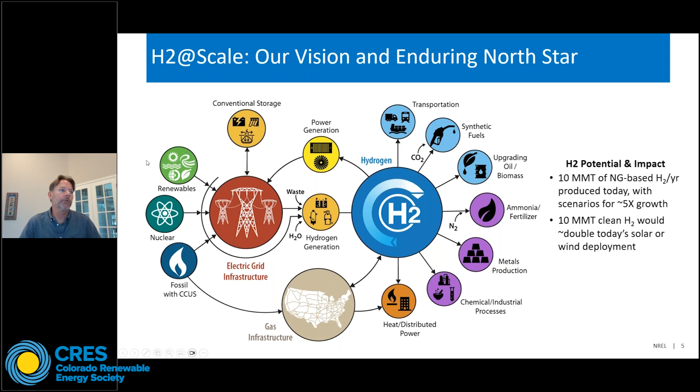So imagine if we're successful in some of these other applications, growing the need for hydrogen by up to 5 times, then we're talking about 5 to 10 times the renewable power on the grid. This is really going to draw a big need for renewables.

So that brings us to the hydrogen shot. This was announced June 7th of 2021, and then there was a summit held later that year. This was announced by the Secretary of Energy, Jennifer Granholm, and basically the target is to do $1 per kilogram in 1 decade - 1, 1, 1. The baseline is about $5 to $6 per kilogram from electrolysis in 2021, with an intermediate goal 5 years later of $2 per kilogram, and then the ultimate goal of $1 per kilogram in 2031, or 10 years later.

Just for reference, today's natural gas-based hydrogen is about $1.50 per kilogram for natural gas. So if you can meet this goal, you can actually undercut fossil or gray-based hydrogen.

Really significant impact. Here's just some of the assumptions, and you can see that the major cost of that hydrogen is the electricity costs. So even if we make the capital cost for the electrolyzers almost zero, we still have the energy costs. We're really depending on folks like you and others in the industry to keep driving down the cost of electricity - in this case, 3 cents per kilowatt hour in 2025, 2 cents per kilowatt hour in 2030.

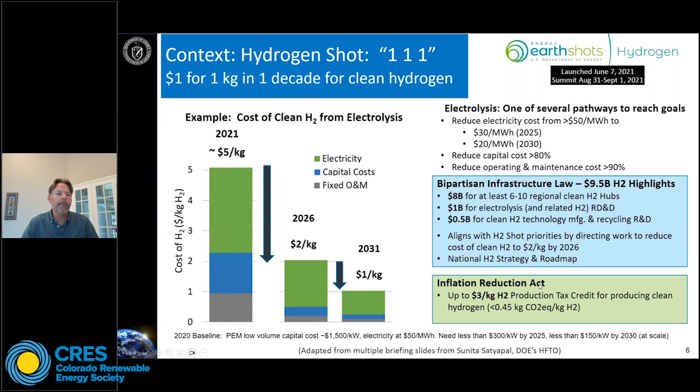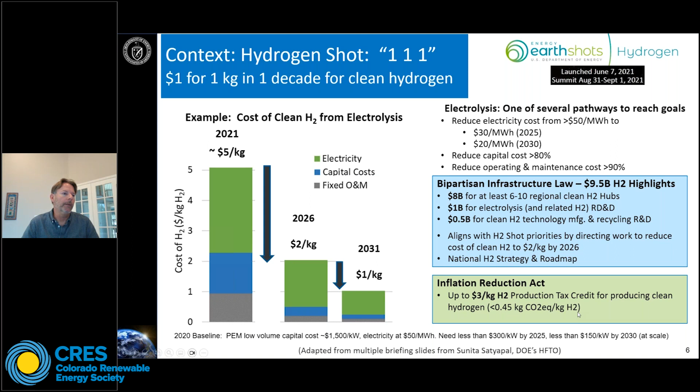And then the icing on the cake here is the Inflation Reduction Act, which came out last, this was last August I guess. This was up to $3 per kilogram of hydrogen production tax credit if you can make ultra low carbon intensity hydrogen, so less than 0.45 kilograms CO2 equivalent per kilogram of hydrogen. I've got another slide here that just shows that 0.45 kilogram greenhouse gas intensity or lower. You can get credit for higher polluting hydrogen, but the credit goes down significantly.

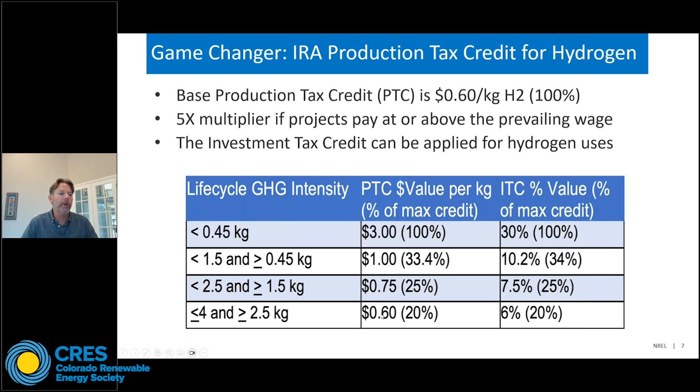So I just wanted to make sure everybody is aware that there's kind of a debate going on in the hydrogen community right now, primarily environmentalists on one side and companies on the other side. The reason why is while the tax credit was passed and signed into law last year, as with many tax credits, especially of this size, the Department of Treasury and IRS has to finalize the details of it because they're not contained or really relevant for lawmakers to decide these details.

So that's happening right now. I think it's actually supposed to come out in the next month or two, and you'll see articles from CPR and NPR touch on that a little bit.

But the things being debated are what NRDC is calling the 3 pillars. First is new supply, also known as additionality. This means if you want to make hydrogen from solar, you actually have to add new solar onto the grid to use that solar. You can't pillage solar that's already on the grid, because that would mean whoever was going to use that solar is now going to use fossil fuels until more solar is added. So that's the new supply or additionality concept.

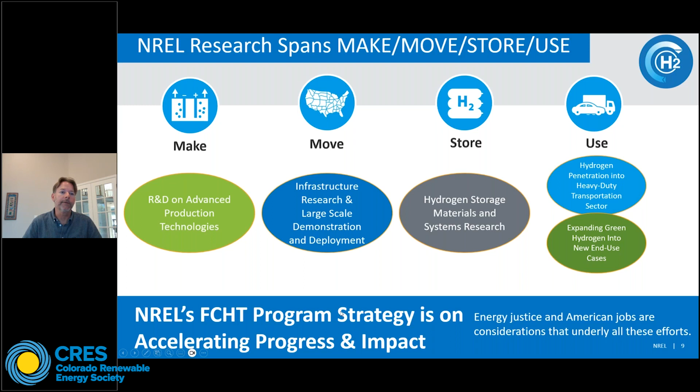I'm going to talk a lot about our Department of Energy programs and projects, but I first wanted to acknowledge that we're also very active with the private sector. This is a growing area, with our funding doubling from fiscal year 20 to 21 — about 35 new partnerships last year, and over $7 million in cash to NREL. For context, our DOE program is about $30 million a year, so this is getting up to about 20 to 25% of our research now being privately funded, taking advantage of and leveraging the investment made by the Department of Energy over the last decade plus.

Since I can't give you a tour of our lab right now, just a few photos. These are catchphrases from powders to power, spanning on the left side more fundamental science and understanding of materials and their electrochemical interactions, all the way over to the right side, where we're actually doing megawatt scale demonstration and research activities.

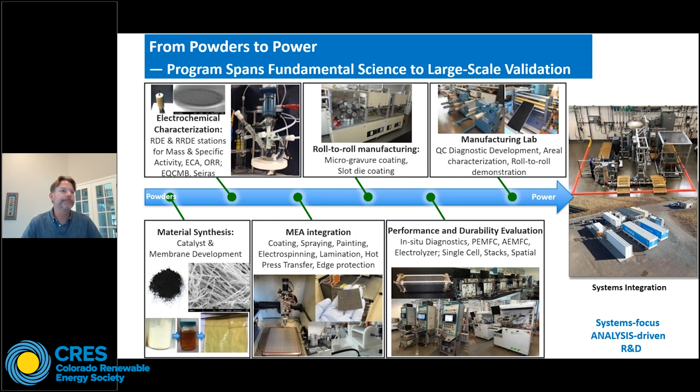I have one more detailed slide here on advanced production technology, since it is so core to our research at NREL and the hydrogen energy earthshot goal of $1 per kilogram in a decade. Wind and solar took about 40 years to get cost competitive, and now they're cheaper than the alternatives. We need to do that for green hydrogen, not in 40 years, but in the next 5 to 10. So in everything we do, we're trying to accelerate the rate of innovation and development, and work with our private sector partners to help them get to market with better products sooner.

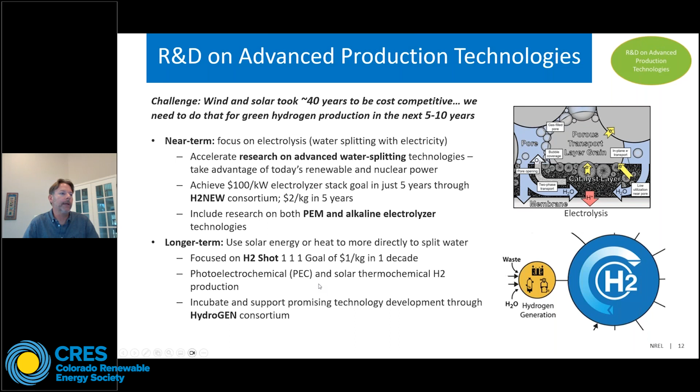On the near-term focus on electrolysis, we're shooting toward a $100 per kilowatt electrolyzer stack goal in just 5 years. There's a consortium that NREL leads called H2New, hydrogen next generation electrolysis of water, which includes both PEM and alkaline electrolysis. Longer term, we have a consortium called the HydroGEN Consortium, which looks at other technologies such as photoelectrochemical or PEC direct water splitting, solar thermochemical, and high temperature electrolysis.

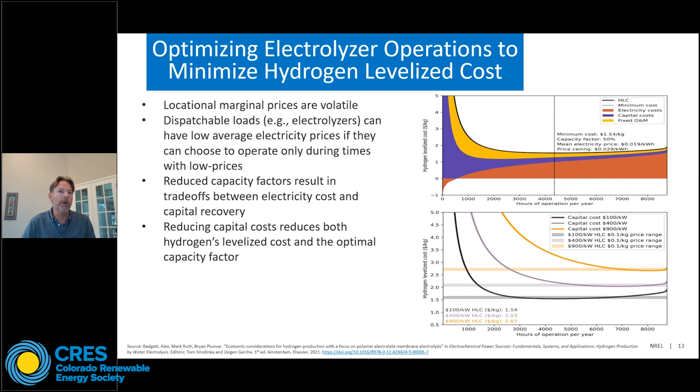We collaborate with a number of other national labs. I mentioned the Hydrogen Consortium and H2New. We also have HyMARC on hydrogen storage, Million Mile Fuel Cell Truck on the fuel cell area, a bio consortium, and a HyBlend consortium on blending hydrogen in with natural gas. So we collaborate wherever possible with other national labs. We are forced to compete sometimes, and when we are, we do compete, and we do pretty well.

Moving on to our spectrum of electrolysis research, really driving down the costs. That for us is happening mostly at the single cell, where we're trying to optimize the materials, thrift iridium, which is more expensive than platinum, and get those out of the cells as much as possible, although there are very few good alternatives so far. We scale those up into short stacks, and then we have this thing we call translational R&D, where as we scale up, we try to feed the lessons learned from system operation and durability back into the smaller scale research. And then finally, we do megawatt scale stack and megawatt scale system research, and I'll talk quite a bit about that now.

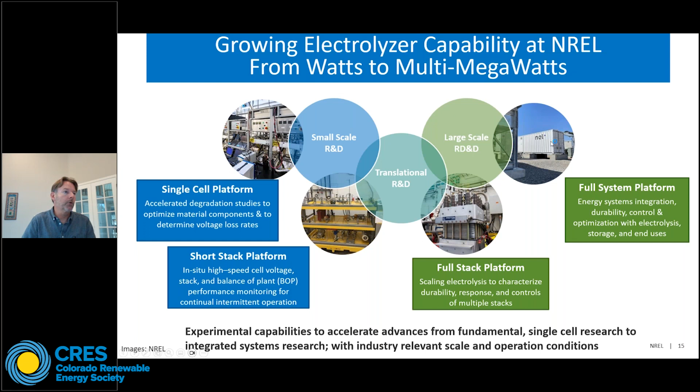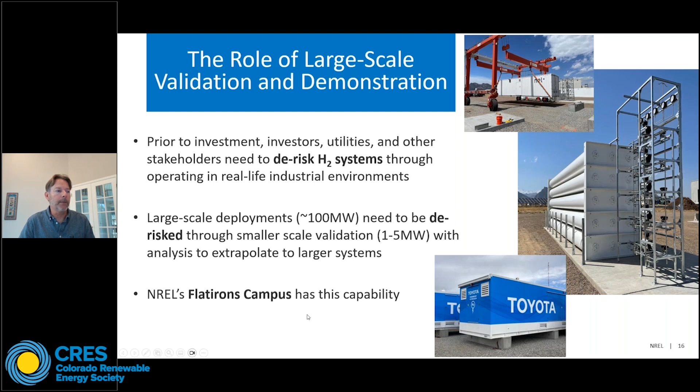You might wonder, why does a national lab with a lot of detailed fundamental science do large scale research and demonstration? The main reason is to de-risk these systems. Utilities and others don't really have the capabilities to do the type of safe, controlled research at a megawatt scale that we do. So our focus is to do that research for them, take some of the risk out of it, provide data, work out some of the bugs, in particular the integration with wind and solar, how to operate these systems, how well they turn down, ramp up, shut off, come back online, and so on. Essentially, if we can do research at the 1 to 5 megawatt scale, others can scale up to hundreds of megawatts with a better chance of success based on what we learn from the smaller scale. Our Flatirons campus now has this capability, and I'll show a couple slides on that now.

We then take the hydrogen, run it through a hydrogen compressor, and store it at about 3,000 psi. That stores about 600 kilograms of hydrogen, and for reference, 1 kilogram of hydrogen is about a gallon of gasoline equivalent, or 34 kilowatt hours of chemical energy. We can then run that back through a fuel cell and invert that DC into AC and put it back out onto the grid, and maybe even flow into your house in Boulder or further. So this is kind of an electrons to electrons flow.

It is, as I mentioned, not the most efficient pathway if you want to store electricity for the short term, but it's really good for not only long duration energy storage, but if you stop short here and don't put the hydrogen back into the stationary fuel cell, but rather put it off into a truck, a bus, a train, make ammonia or green steel with it, you can really use the power of that molecule for its additional capability rather than just the electrical value of it.

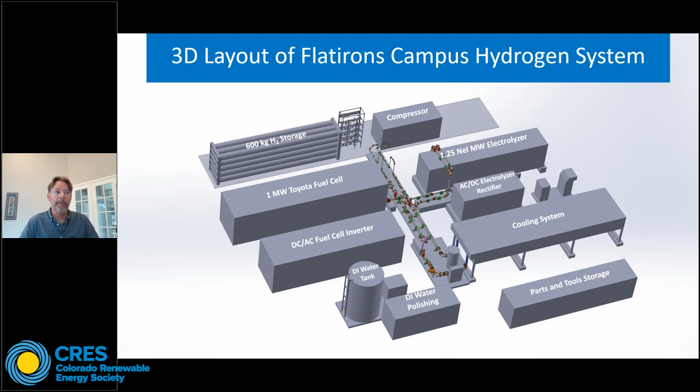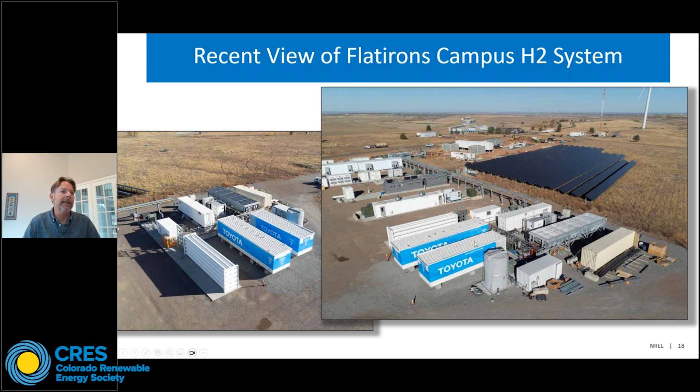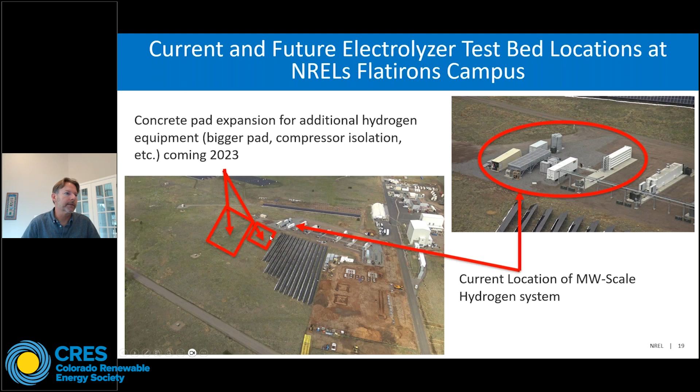Here's a photo from the top of a wind turbine, the same system actually before the fuel cell was delivered and before the compressor was delivered, but just to give you a sense of the scale of these 6 pads. We are also expanding our footprint to where these 2 red rectangles are, and I've got a slide showing that right after this one.

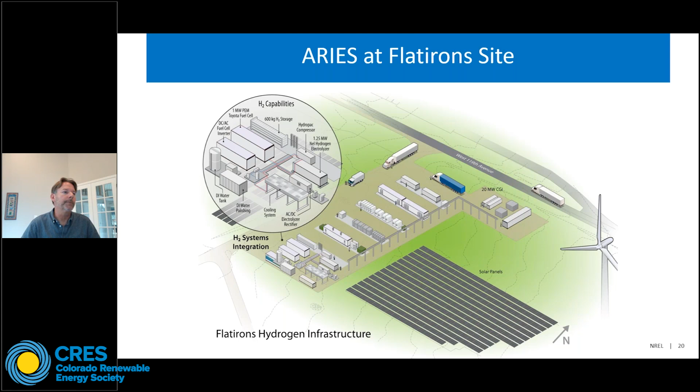This just shows some of the other technologies on pads 1 through 5. We're basically on pad 6 here, plus all this other stuff is sitting over on the gravel. Right off the screen here is where we're going to be expanding from 1.25 megawatt up to 5 to 6 and on to 10 megawatts. This just shows the location of that pad 6 plus, and we're going to have some trenching here, a much larger pad as well as gravel, and this will be right next to a heavy-duty truck charging system. We're actually intending on eventually being able to fuel heavy-duty trucks at this location as well.

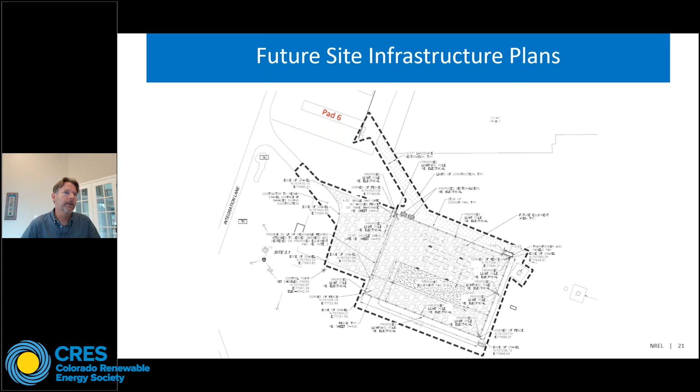Here's a little bit more detail. It's probably too small for you to read, but it's a 30 by 120 foot concrete pad, heavy-duty, where it can actually withstand the vibrations of a big hydrogen compressor that could do, say, 10 kilograms a minute compression. There are places for different stacks and systems and balance of plant, a lot of power electronics, cooling, and a water deionized system.

Basically, we will be able to either take a 10 megawatt full delivered system, or do a 6 megawatt partial system in various configurations. So 6 1-megawatt systems, or 1 6-megawatt, or 2 3s, or 3 2s, and so on, by having a flexible electrical bus. And then we've got a core balance of plant that we can actually just surround a PEM stack up to 6 megawatts, or an alkaline electrolyzer stack at 2 megawatts.

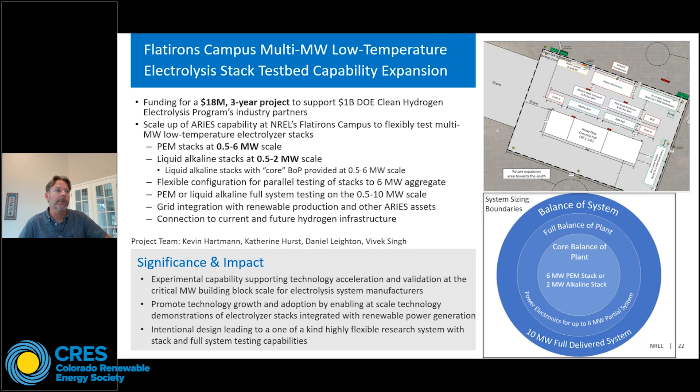There's some other details here on the left, but this is an 18 million dollar project that was just approved last month. It will take us about 3 years to purchase, commission, and install all this hardware, but it will really give us extraordinary capability to go up to 10 megawatts in electrolysis at our Flatirons campus.

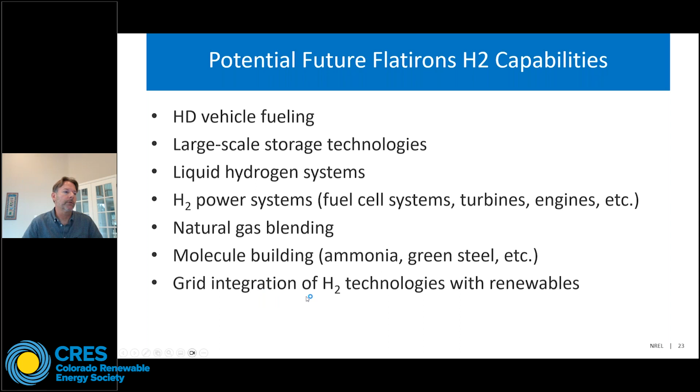Beyond that, I mentioned a few of these already, but we're looking to do heavy-duty vehicle fueling, large-scale storage technologies. We're targeting like 10 metric tons or 10,000 kilograms, likely underground in engineered systems, potentially liquid hydrogen systems. There's a big need for this from the private sector. And then hydrogen power systems in general, like fuel cells, turbines, reciprocating engines, and so on. Natural gas blending with hydrogen, and then what we call electrons to molecules, or molecule building, where we can actually make ammonia, green steel, and so on. And then finally, really a focus on greater integration of hydrogen technologies more directly with the renewables.

So I want to introduce a concept we call ARIES, Advanced Research for Integrated Energy Systems at Scale. We refer to it as ARIES because it's just easier to do that. But really what it means is that we're connecting all these technologies together and really focusing our research up at the Flatirons campus and at ESIF on the integration.

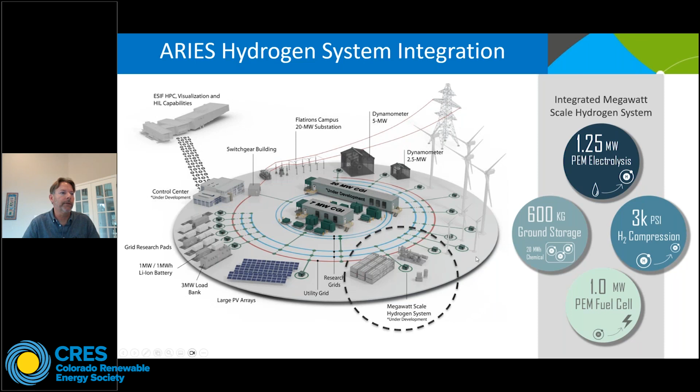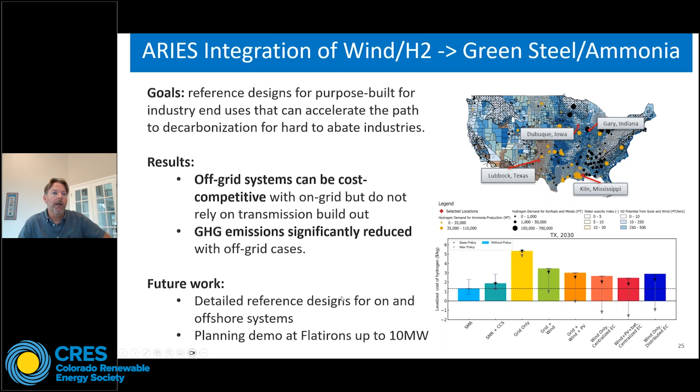They're also at the end of a long transmission line subject to weather disruptions and outages, sometimes several days. So they have 3.6 megawatts of diesel generators that can start up and give the sine wave to the rest of the system so that the PV and batteries can be added onto the grid. This project is about doing an advanced inverter with grid forming capability so we can use the hydrogen assets, in particular a small fuel cell, to help start the grid and be that orchestra conductor of the sine wave for all the other assets on the grid.

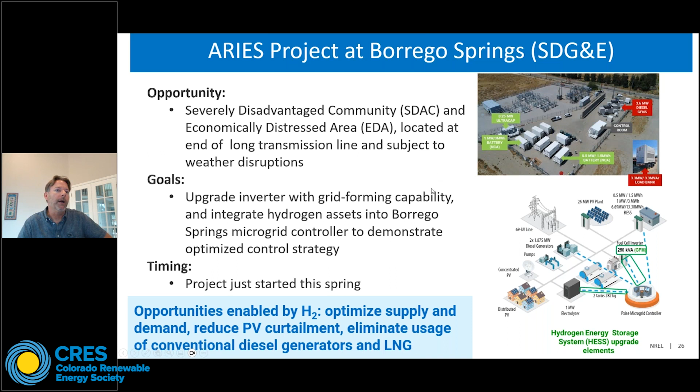I should mention this is a severely disadvantaged community, an economically distressed area, basically some golf courses and hot springs, and a number of trailers that people live in. We don't want to make the air quality worse for them. They really want to get rid of these diesel generators, so hydrogen is a good option for cleaning up and giving them a more resilient grid.

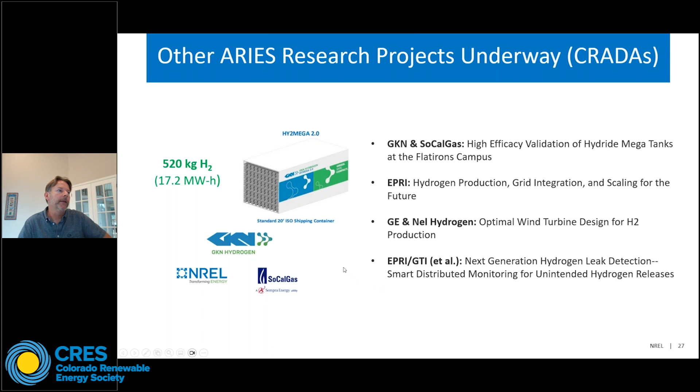I won't go through these in detail, but there are a number of other research projects underway. Just focus on this one with GKN and Southern California Gas. We're going to be storing hydrogen in the form of metal hydrides in two 20-foot ISO containers, with a thermal management ISO container in green in the back. This will store 520 kilograms of hydrogen at low pressure, about 300 or 400 psi. Coincidentally, that's the output pressure from the electrolyzers, so you can get rid of the need for a hydrogen compressor, which is a capital cost but also a maintenance headache, as they tend to have a lot of parts that wear out and require servicing.

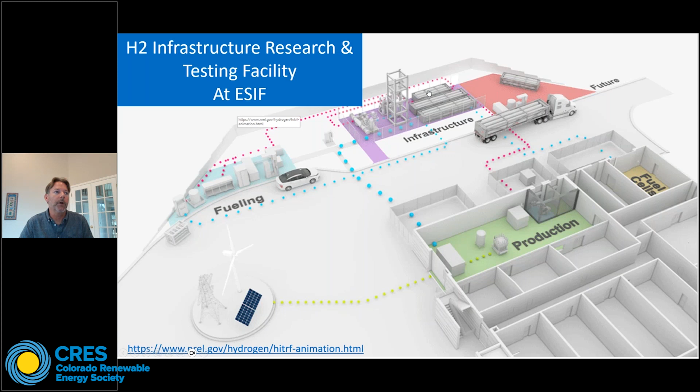Moving from our Flatirons campus down to Golden, this is an overview of the north end of our ESIF building and a bunch of the infrastructure research out on the pad, light duty fueling on the left. This is no longer future, this is current. Heavy duty fueling on the right, and all of our compression and storage in the center.

This is what it looked like in early 2020. You can see it was really focused around the light duty fueling on the left. There's a fuel cell Hyundai vehicle, and the right side was all just gravel.

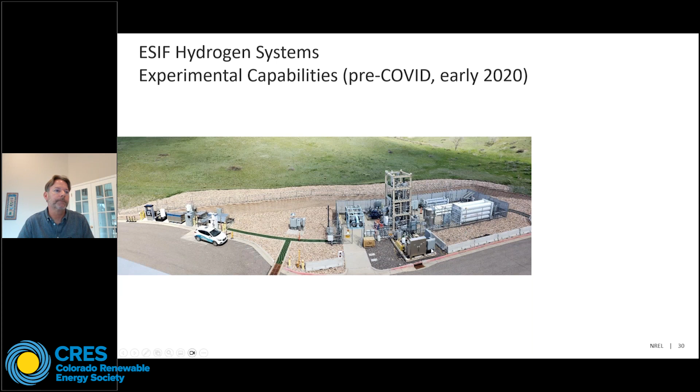During COVID, with social distancing, masks, and shutdowns, we were actually able to expand the pad and repipe our system so we could do high flow, adding this heavy duty fueling capability on the right.

Here you can see 9 carbon fiber tanks in this rack. That simulates a heavy duty truck that can store over 80 kilograms of hydrogen, enough to take an 18-wheeler with 80,000 pounds about 500 or 600 miles.

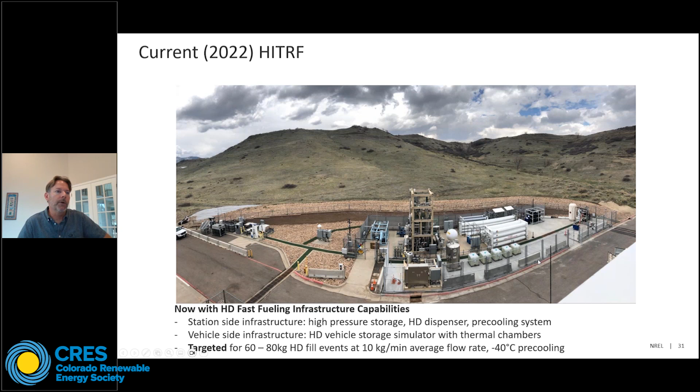This is a close-up of the vehicle simulator, the truck simulator, with the 9 carbon fiber tanks. We're super proud that last October, right at the beginning of this fiscal year, we did an over 80 kilogram fill of these tanks in 6.5 minutes, with mass flow rates of 12.5 kilograms per minute on average, and up to a peak of 23 kilograms per minute.

If that doesn't mean much to you, I'll put it in terms of battery electric charging. Flowing hydrogen, 1 kilogram per minute of hydrogen is equivalent to the energy of 2 megawatts. So this 12.5 kilogram per minute average flow rate is really like over 20 megawatts average, and over 40 megawatts peak.

This is really the reason why trucking companies like hydrogen, because it gives them more of a diesel-like refueling rate and long-range driving.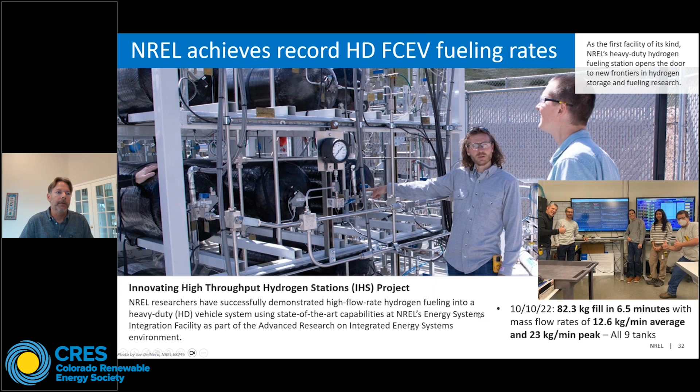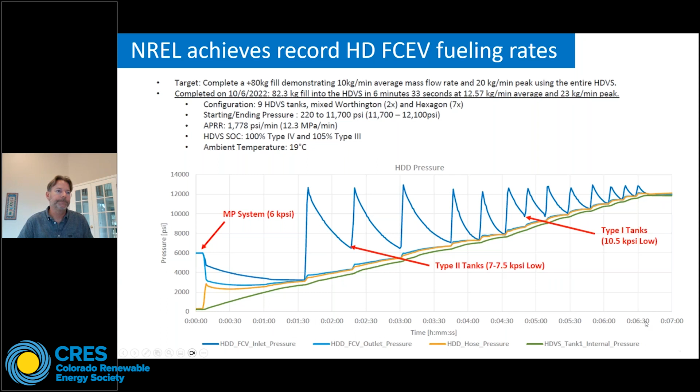I've got just a couple more slides and then we'll open it up to questions. This is one of our electrons to molecules activities.

This project was sponsored by Southern California Gas, who really wanted to look into how to make renewable natural gas out of renewables, and also was sponsored by the Solar Office, the Hydrogen Office, and the Bioenergy Technologies Office.

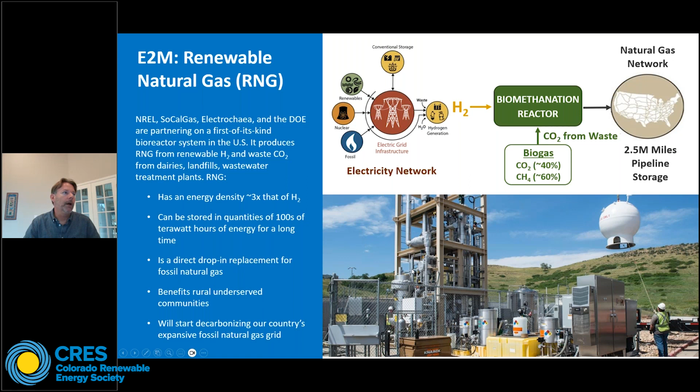This is my last slide, just giving a little bit of a glimpse into some of the expansion into other end uses of hydrogen. We have a project with the Federal Aviation Administration to do a study of hydrogen infrastructure research for the whole ecosystem around airports. So this means not just the plane itself, but the shuttles that carry people to and from rental cars, the baggage

tugs, the things that push the planes back. There's a lot of things running around the airport, a lot of vehicles, as well as a lot of stationary power being consumed before the airplane even gets pushed back from the tarmac.

So we've done a number of analyses there, estimating the demand from the aircraft, estimating the demand from the airport infrastructure, and then also looking at safety setbacks and other things. This is an active area of research, and I believe Airbus said they were going

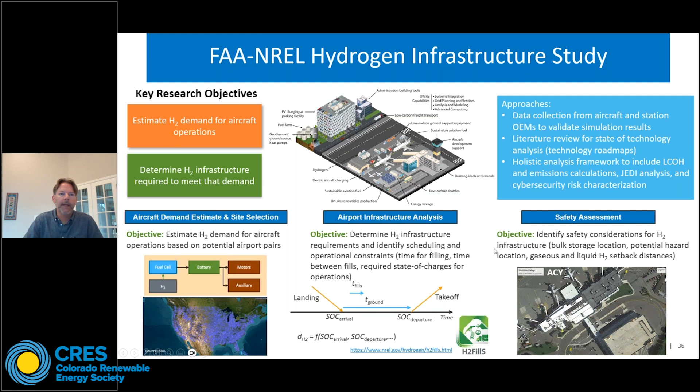to have a number of announcements this week at the Paris Air Show. I haven't seen headlines on that yet, but I've been keeping my eye open for it. With that, I will stop and we can open it up to any questions. I'm going to stop my screen show here.